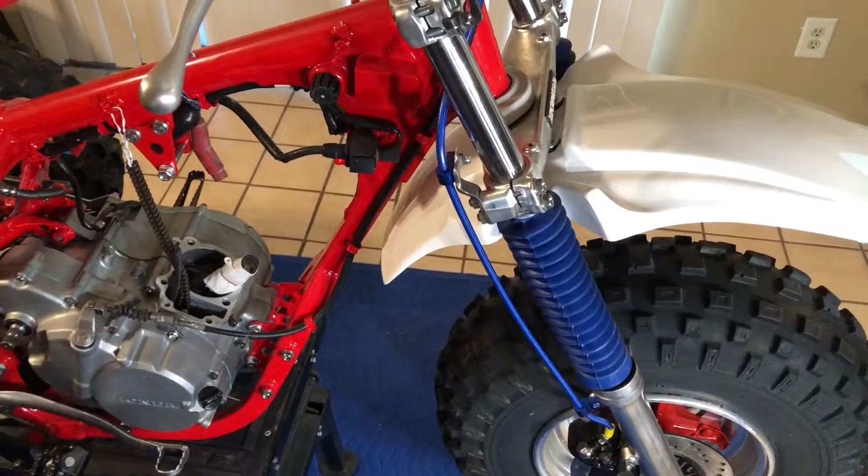All right, folks, check it out. We are ready to start putting the top end on this dog.

We're going to start out by putting the cylinder studs in. We're going to get those cranked down, and we're going to get the piston measured up. We're going to get the jug installed and the piston installed, and get all that together. We're going to put the rockers in, adjust the cylinder head, adjust everything, get all the gaskets down, and get everything sealed up.

Yeah, we're getting closer. Then we got this gas tank to go right up on here, and an exhaust, and an airbox, and a carburetor. That should about cover it. I'm ready to fire this dog up, let the engines roll. It's time to burn it down.

Yeah, you know it, the Black Label Society still rolling.

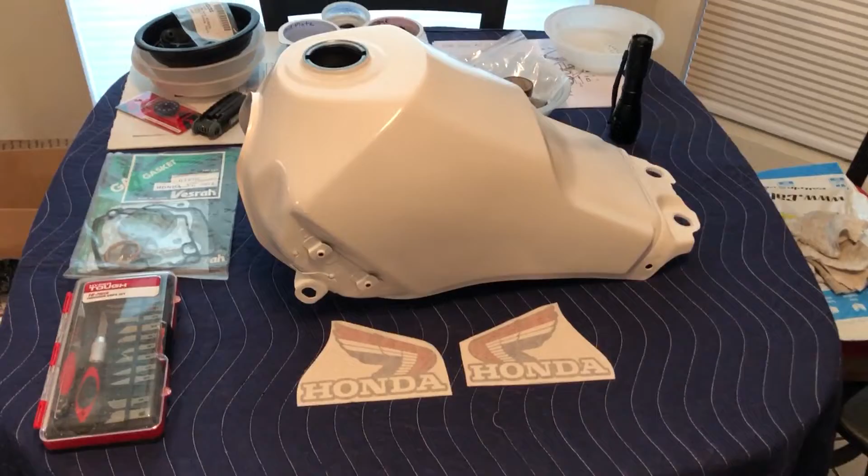Woo, all right, check it out. And then over here, yep, there it is. Look at that dog right there. We got the Shasta White, the Honda Shasta White laid down, and we're just getting ready to put the graphics on. Oh, that dog's gonna look nice. Woo, it's looking good, yes sir. We're getting there. Yeah, here we are.

There we go, there's our cylinder studs. We're gonna be putting those in here shortly. And yeah, you know what time it is.

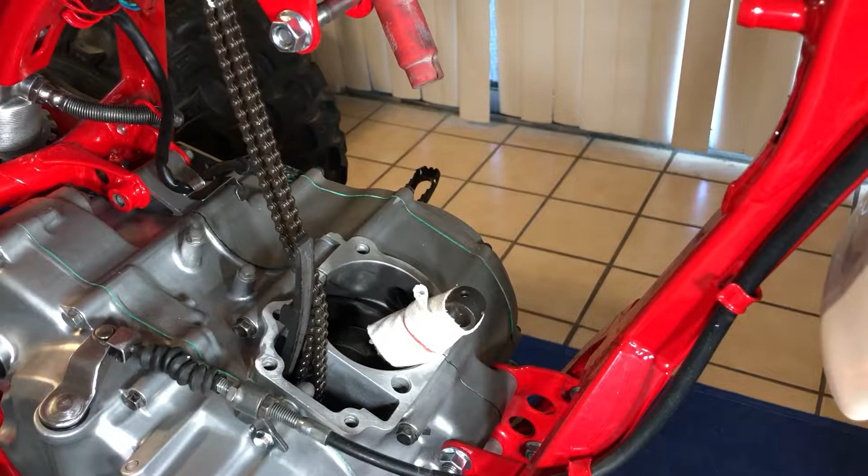All right folks, so the first step we're going to do when putting this top end on is put the cylinder studs in right here. We got 6 of them, 4 larger ones and 2 smaller ones. Obviously the 2 smaller ones are going to go where the smaller holes are.

Well, you can already see - I forgot and kind of got ahead of myself, and I didn't record it. I apologize, but I already got the clutch in here. All it is, it routes down through here, goes through the cables, through the cable holders right here, and zips in here. You attach this little guy, slide it through here, and these 2 nuts secure to the bracket that we put on there, and that's about that. Then you just pull it tight and adjust it at the top. We can get into the adjustments at a later time, but the clutch is already here in case you noticed.

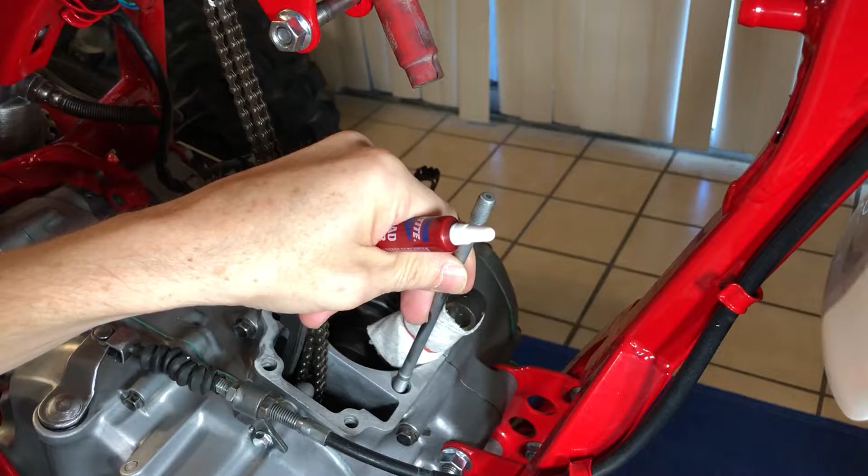And let's get these studs in there. So what we're going to do is put this raised edge down here, going to the bottom, and that is going to be the bottom, how it's going to stop, right? So we're going to blue Loctite these, a little bit of blue Loctite on the threads here. And why Loctite puts blue Loctite in a red container, I'll never know. But anyway, they do - make sure it's the blue liquid though. So it's just going to thread right in here.

And we'll just get all of these started real fast. Some more blue Loctite. And then we got one back here, and then we got the one behind here. So if we can get this guy to stay up out of the way.

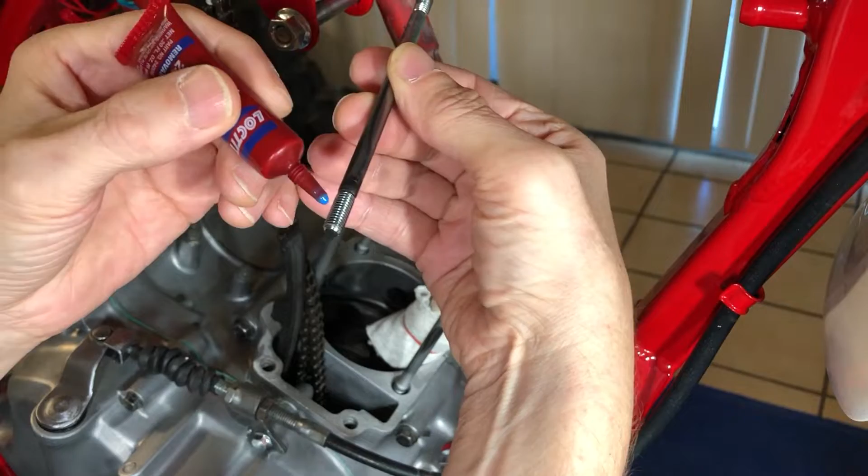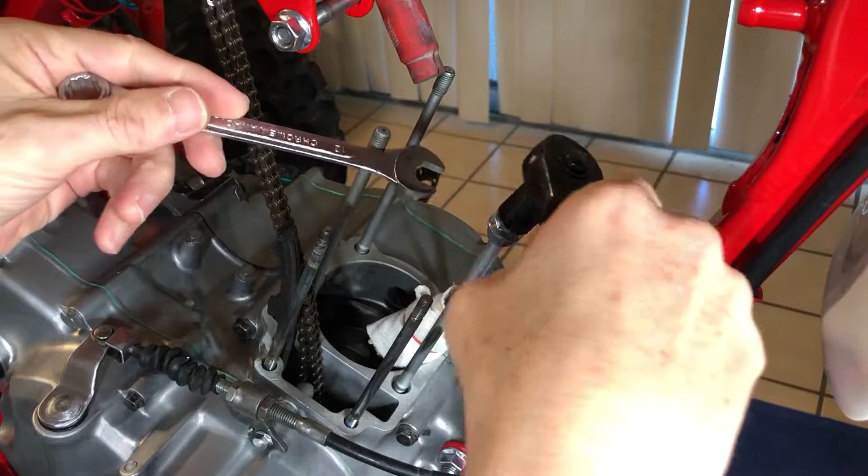And then what we're going to do to tighten these is we're going to flip this over. We're going to put one of the nuts down this way, and we're going to put the other one over the top. Then we are going to tighten them against each other, and that way we can just thread this right on in there. All we want to do is just snug them down in there, and then you can just back this off. And that's all there is to that.

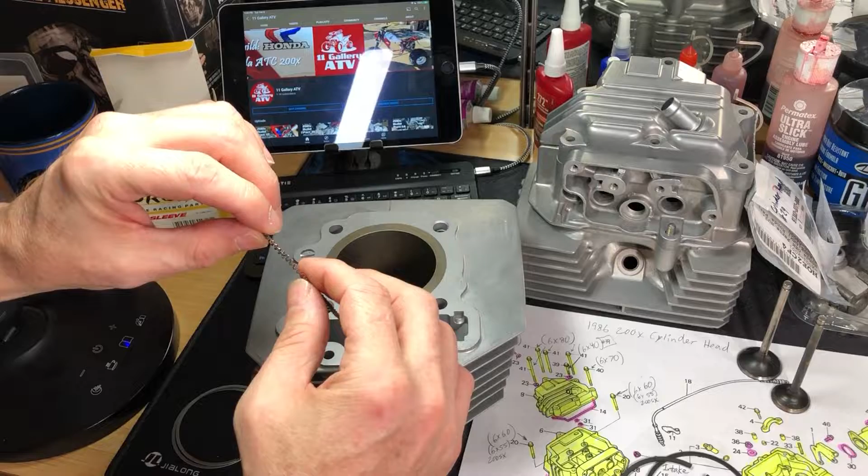And we'll get into how the ring stuff goes, because you want this guy to be touching like so, and not overlapping like that. That'll be bad. You want it to be butted up against itself right here. But we'll get into that whenever we put these together.

So these are the ones we're worried about right here. And these have an R25 on them. So that's a good sign. And this one has an RN25. And this one is a little bit thicker than this one.

Alright folks, so let's get these measured up and see about the ring gaps and make sure that everything's cool. It says in here, of course, that these rings are matched to the piston from the factory, of course.

And our piston is matched to the bore now by the shop, so all of this should be good to go, but let's give it a check to make sure.

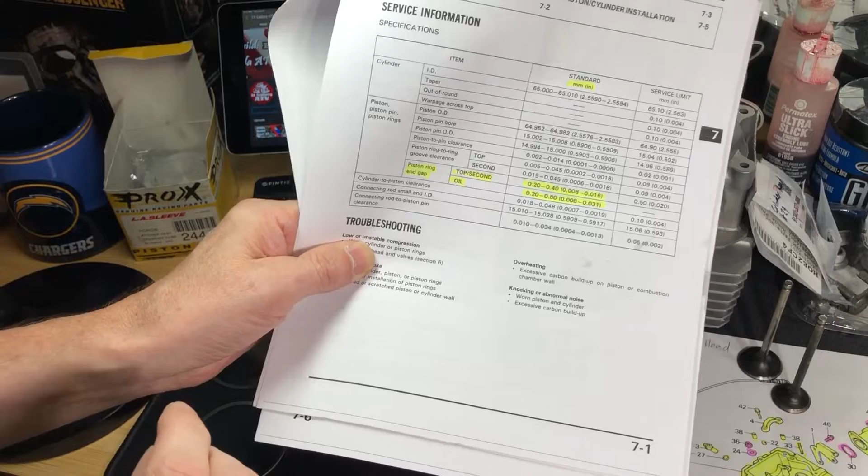And here are the ring gaps. So from the manual, the top and the second are both the same, and it calls for

0.2 to 0.4 millimeters, and that would be 0.008 to 0.016 inches. So we're going to use the inches.

I have both, but we're going to just use the inches because I feel like it. We're American. We're using inches. So anyway, let's do that.

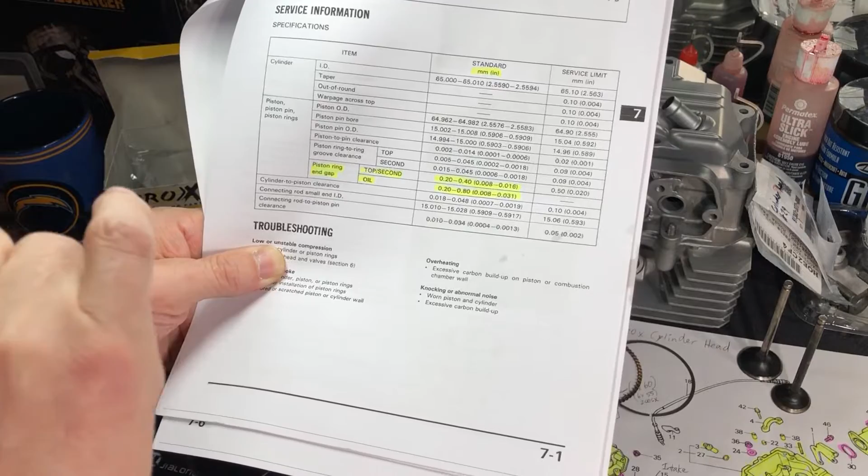So yeah, first step we're going to do. So what we're going to do, don't want to lose these.

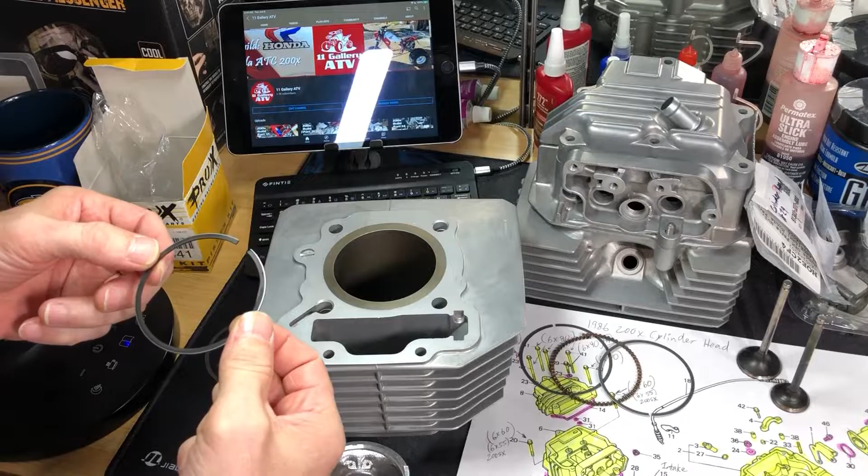Those are the circlips. So the first thing we're going to do is get our piston out, and we're just going to put this down in here. This is the RN, so this would be the bottom ring, but we're just going to put this in here.

And then we're going to use the piston to push it down a bit so that it's level. And now we got the gap there. We can measure it. So I got two different sets - this is 0.008 and this is the 0.016. So we could be anywhere in here, but let's measure the smallest one first to see if we can fit that.

And that's about right where we are, is the 0.008, because it's a pretty decent fit right there. So I believe that we're right at the 0.008, which is the smallest one. Man, these rings are exactly like they said. So this one's good. I also have this style, and either one doesn't matter, but let's just check them both to see if they're the same. Not really much play in there either, so these are exactly 0.008.

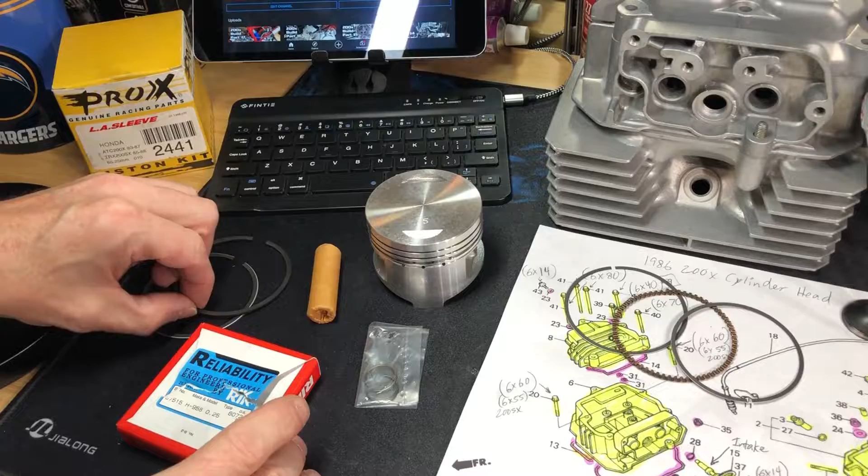So before we install the rings onto the piston, I am going to install one of the circlips first, while there's no rings on there, obviously it makes it easier to work with. And we're going to save this one for when we put the piston onto the connecting rod. So what I'm going to do is the intake - the piston is going to actually go in this way, because the intake will be the back of the motor. So this will be the left and this will be the right.

So I'm going to install the left one first because I'm going to put it in from the right side. And you want this one in the back, so when we put the wrist pin through, this will be the right side, and we put this side through. This one will already be in there. So it's going to go right here. And what I'm going to do is...

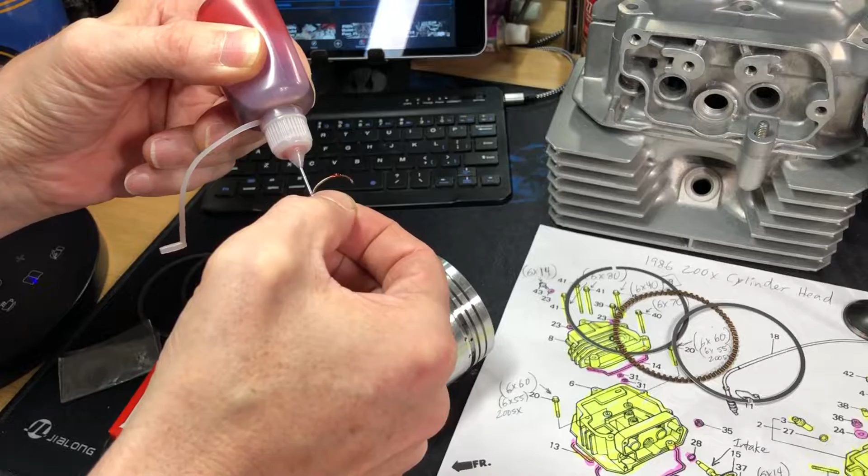Lube it up with some of the Ultra Slick Permatex Assembly Lube in my handy container. And of course, it doesn't matter if you get this stuff all over the place because all of this is going to be inside of there anyway. So, what you want to do with this is, I like to on these kind of pistons, since the gap is at the bottom, I'm going to put this at 120 up there at the top, and it doesn't matter which side - just you don't want the gap in the gap down here.

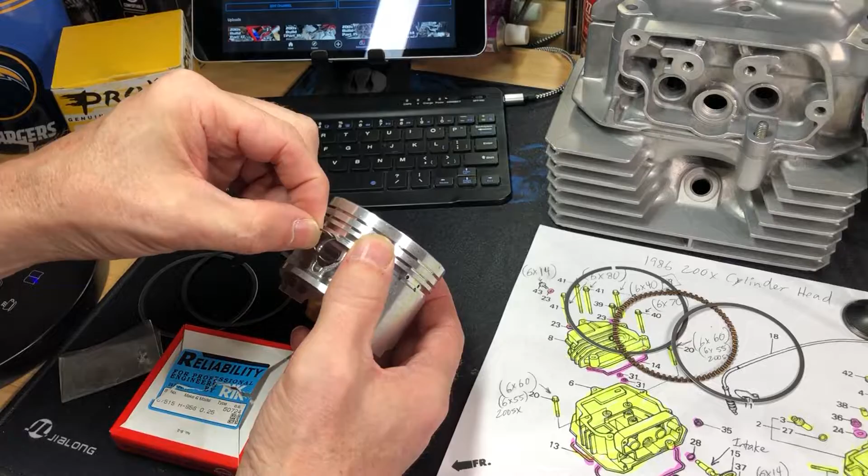So what I'm going to do is try to get one of them, the groove started here. Sometimes I can do this with my finger, sometimes I can't. Oh, we were in the groove, but I wasn't quite - there we go. Alright, well this one's being a pain in the ass. I'm going to need some extra finessing tools here. Alright, so the fingers didn't work.

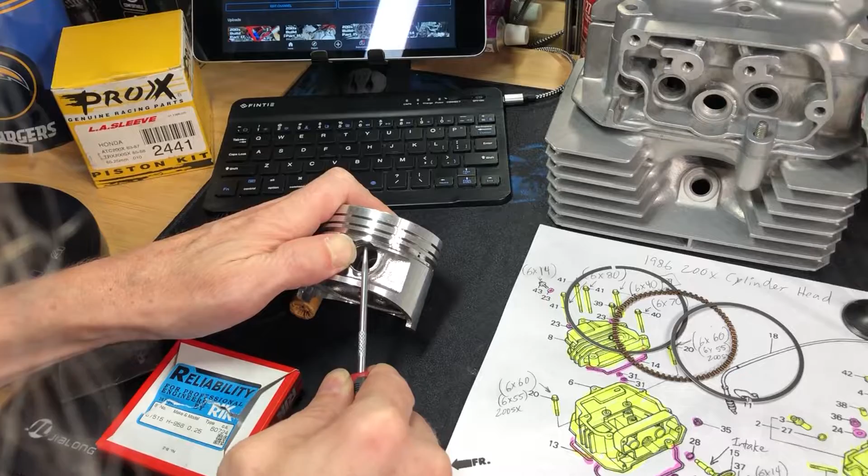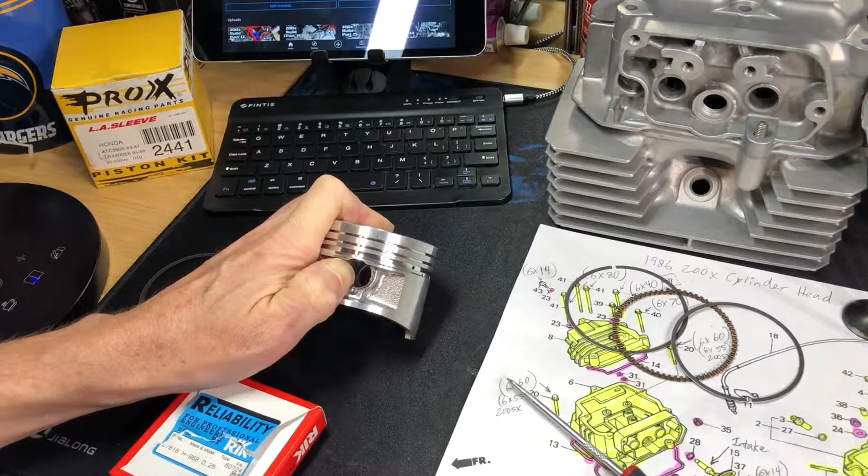So we'll try that again. We'll put it up in here. There we go. Now let's get that up into the groove. Let's try it with a screwdriver instead. There we go, now we're almost in there. So then we can come back with the pick. Boom - so that guy's in there like so.

And we're at 120, exactly where we wanted to be - we're away from the groove there. So yeah, alright, we got the circlip installed on the left side. So we're going to work like this, since this is our piston orientation, intake, back side of the motor. Again, some of your pistons, you want to make sure you got this in the right orientation though.

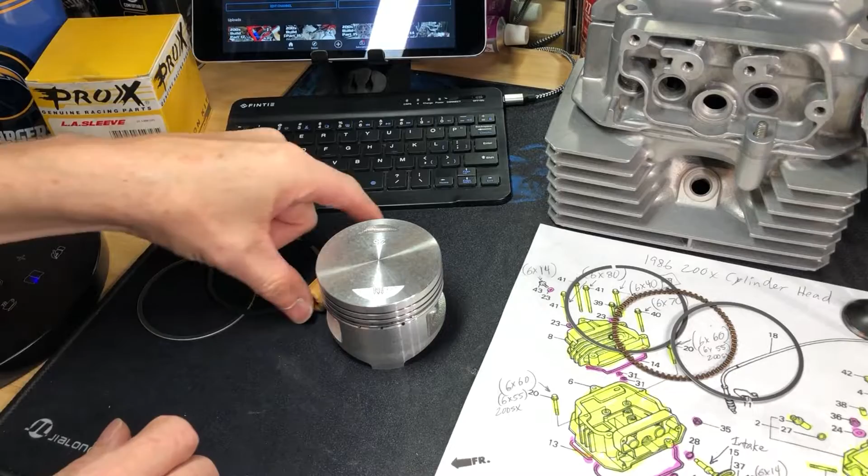Some of your pistons will say have an arrow, like Wiseco pistons have an arrow, and they point towards the exhaust - they don't have intake. So be very careful when you do this, that you orientate your piston in the proper orientation. Okay, now we can set all this stuff aside. We're done with the box. We're going to need this guy, so we'll set him aside. We're going to need the wrist pin later. Now we can put our rings on, and the way this is going to work is we're going to start with the expander.

And the way this is going to work is you want this guy to be butted up against it like that. You do not want these overlapping like this. You want them to be resting right here, right on the edge. Now, it doesn't matter whether this goes up or down.

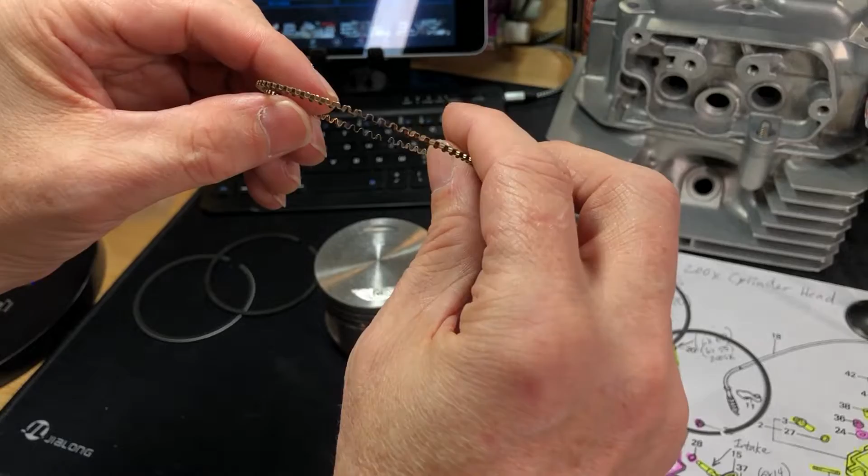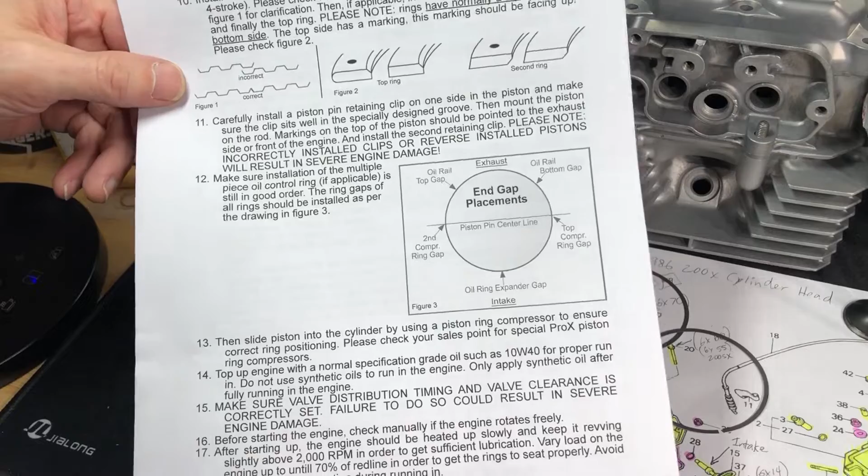And here's the diagram that I have from ProX. And this is going to be where all of our ring gaps are going to be. Now, the OEM manual calls for these in a little different position. But I'm going to use this because I've used this before. And this is the exact diagram that came with the piston that we're using and the rings. So we're going to use this orientation.

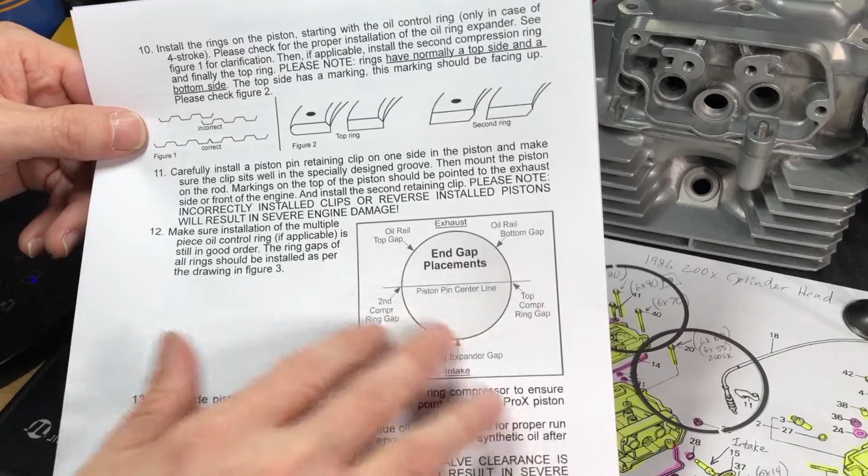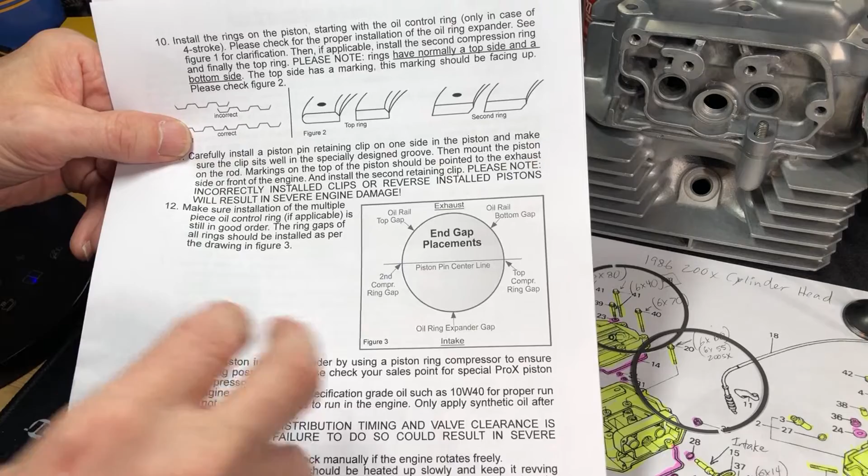But the OEM one calls for these two gaps right here to be right here, 120 and 120. They don't call for them to be directly at the wrist pin. I'm not sure if that makes any bit of difference or not. I don't think so. That's why we're going to do it this way. So we're gonna put the oil expander gap at the bottom, and that will be on the intake side.

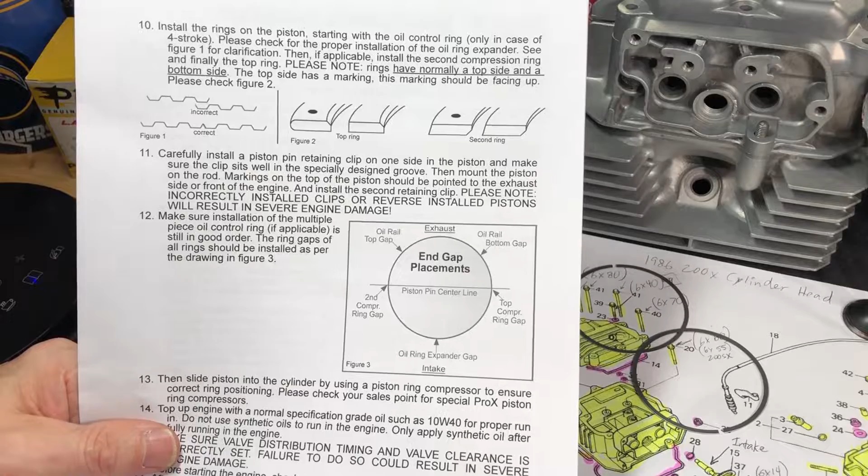So we're gonna put the oil expander gap down here, and then we are going to put the top ring gap over here, the second ring gap over here, and then we're going to put the two oil rails over here and over here. Now, I'm quite sure if you wanted to put the top and the second gap here and here, that would be perfectly acceptable. But I'm going to do it the way this is because this is the piston I got and the rings I got. So this is the way it's going to be. All right, let's get it done.

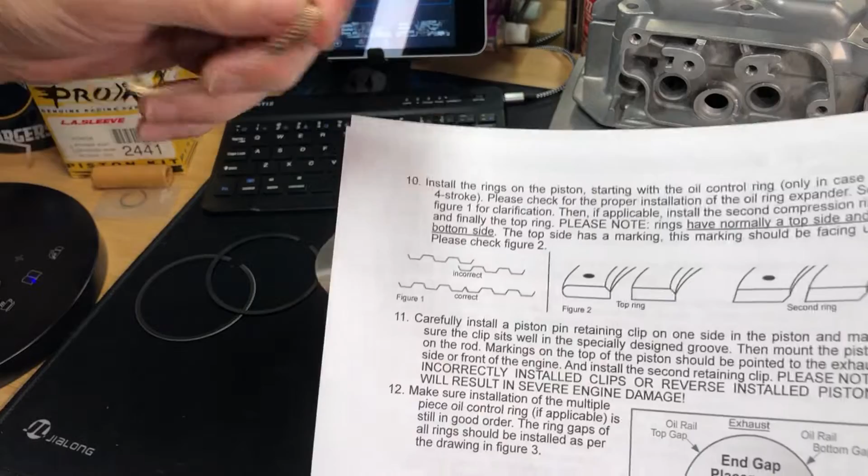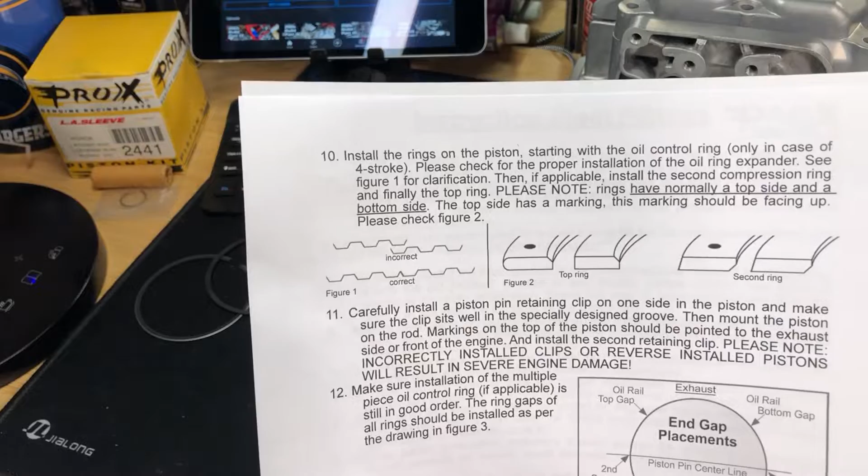Oh yeah, one other thing to mention. It doesn't matter whether this goes up or down like this, but I'm just going to put it up, seeing how that is the way that the diagram is, but for no other reason than that. But it does not matter which way you put it. So if you've installed your motor and you realize that you put those facing down, so be it. Run it, do it, send it.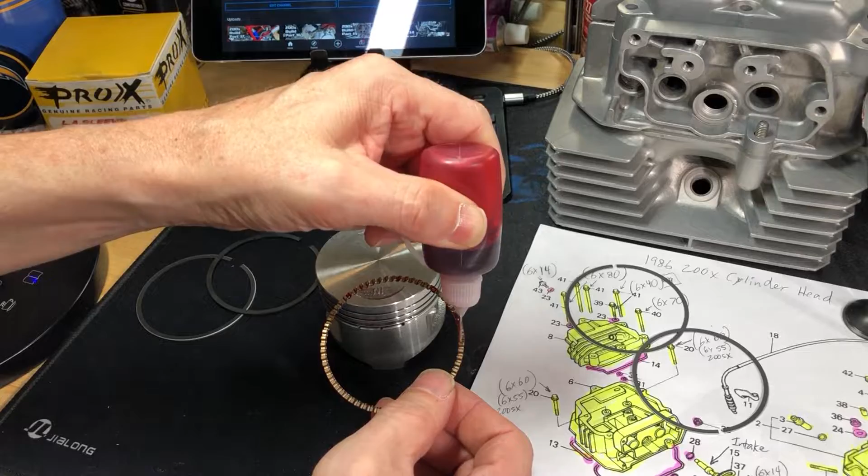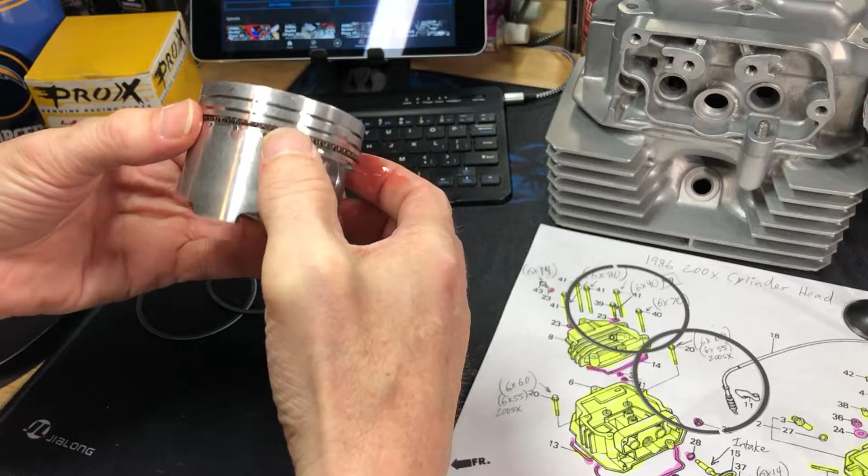It'll be all right. So what we're going to do is we're going to use some of the Permatex Ultra Slick Assembly Lube, and we're going to hit all of these guys. But we're going to use the easy container. Alright, so this guy is going to go with the gap on the bottom. So we're going to put him right in there. Boom. And we'll make sure this dot right here happens to be 90 degrees, so we'll put it right at that dot.

And then next, we'll take one of these guys. And these oil rails, they don't matter which way they go. They don't have a top or a bottom. They are interchangeable. So the diagram calls for the bottom oil rail to be right here. So what we're going to do is just, and then we're just going to walk it around. Then you just keep walking it around and make sure that it goes onto the bottom.

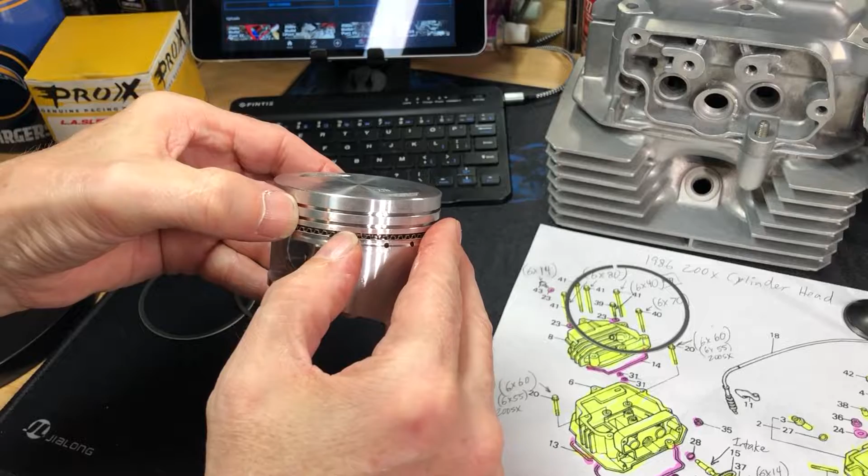And there it is. And there's our gap right here. So we can also kind of push that out, right? And then you can snag it. Make sure that you hold the oil rail though. The oil expander. There we go. We're about right here. 120.

And once we get all of these installed on here, we'll fine tune it, of course. We'll grab ourselves a little pick and we'll fine tune all the gaps to make sure that everything is where it needs to be, but we're going to try to get it exactly where they are without too much hassle. But anyway, now we put on our top oil rail.

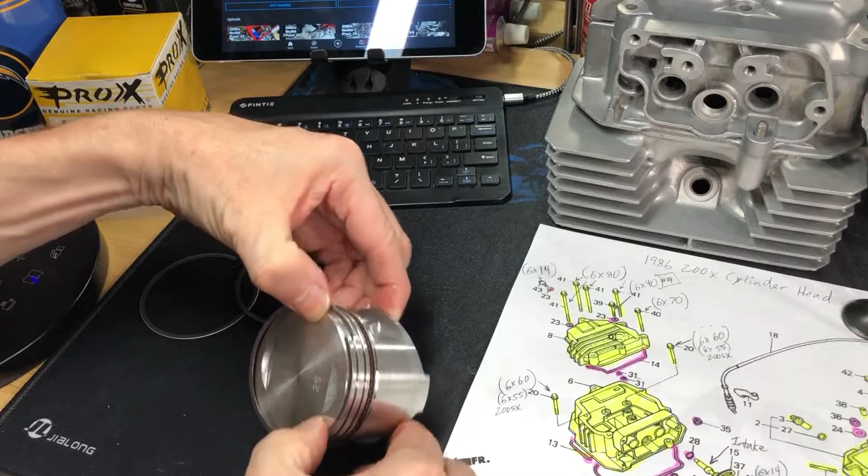And we're going to try to get this gap to be right here. We got the other one on this side. This guy is going to go over here. So again, we get it started. And then we just walk it around and make sure that it's on the top, which it is.

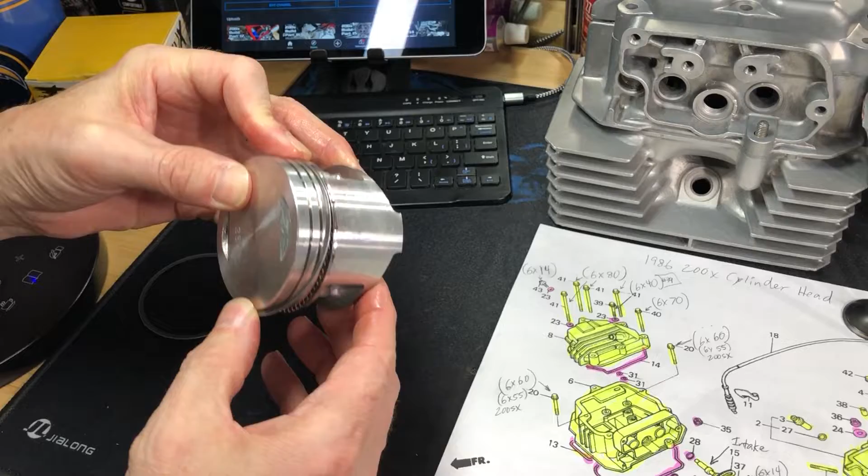And there we are. Now we should be right about here, which we are. We'll get these over here. We'll put one on one side of this guy and one on this side of this little mark. Right now I'm over here, but we'll fine tune it once we get these on. But you definitely want to make sure you got one on the top, one on the bottom, and then you got the oil expander in the center.

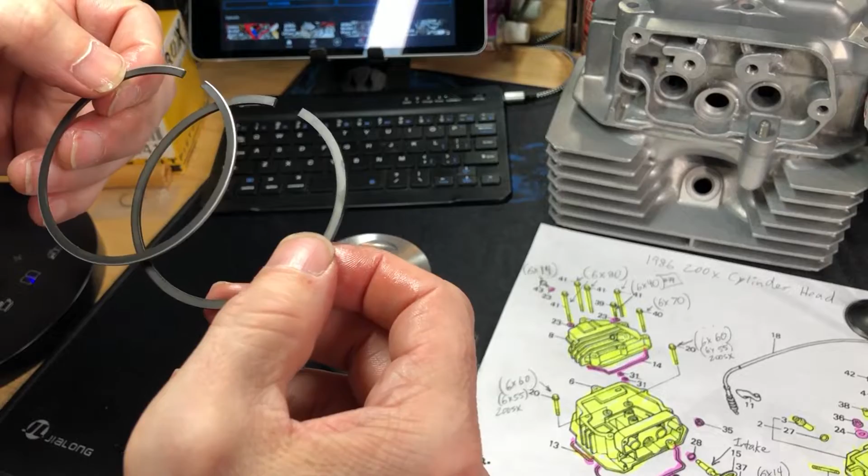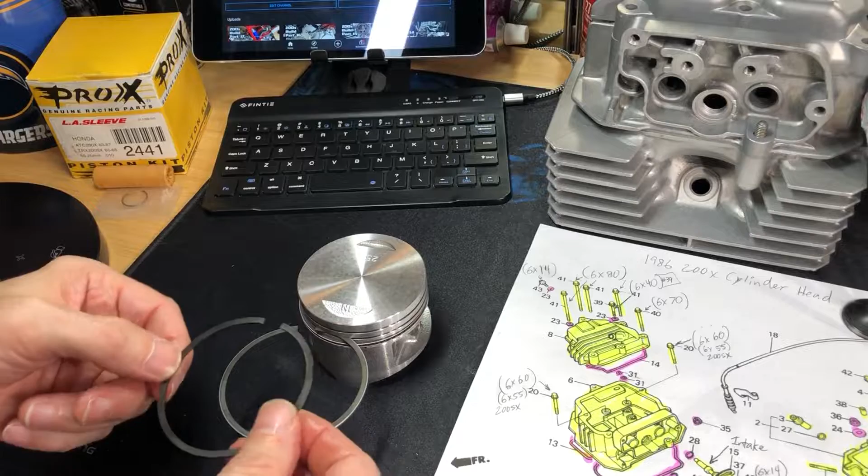So now let's put our piston back in the right orientation. Now with these, we got a top and a bottom here, right? So the way this works is this one has an R. I don't know if you can see it or not, but there's definitely an R on this one. And this one has an RN. Now the RN is going to be the bottom one. It's going to go in this slot, and the R is going to go into this slot. So the R is on top, the RN is on the bottom, and the writing is going to face up.

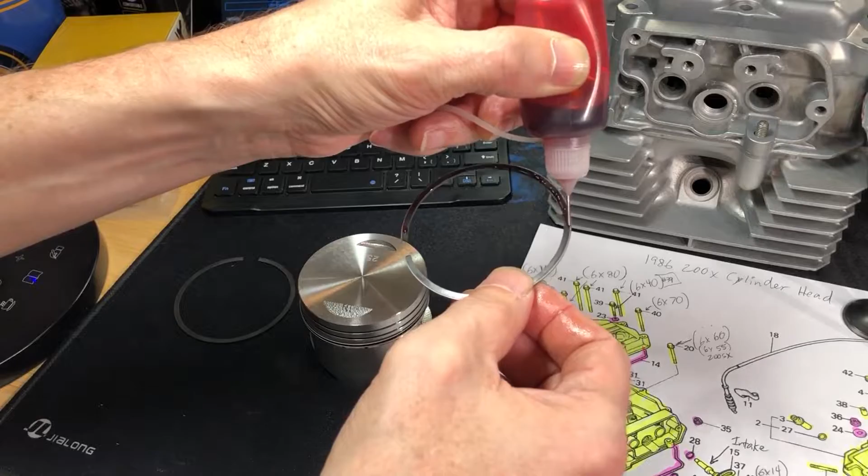Alright, so let's get us some assembly lube on this guy. We're going to go top and bottom with these because the other ones had other rings that went with them, so they had more lube. These guys are standalones. So there we go.

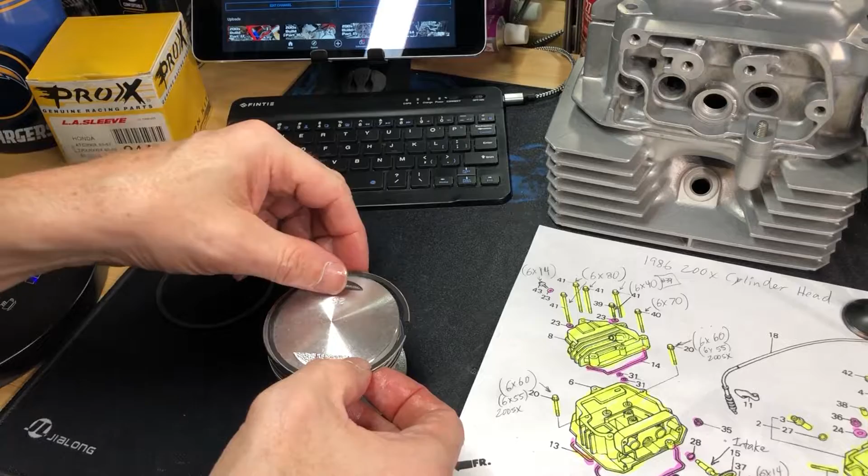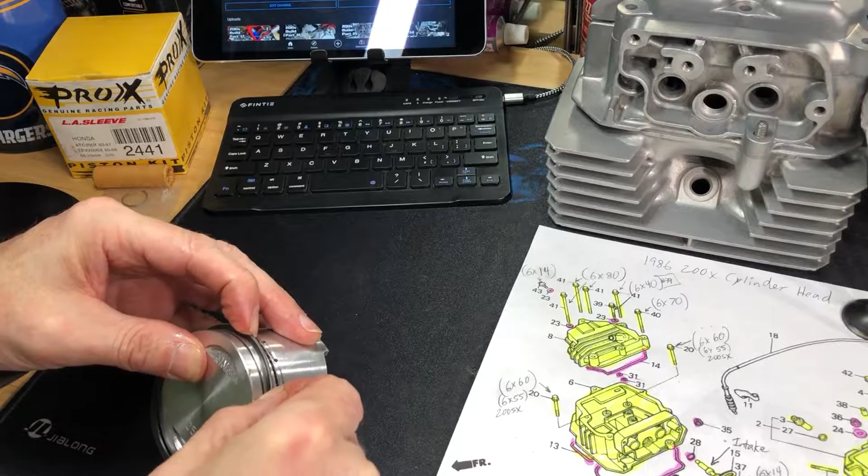And now the ProX diagram calls for these two to be staggered 180 degrees apart, and we're going to put the second ring gap over here. What you want to do with this is get it started in the groove, right there, and then just walk it around. Be very careful while you keep sliding it down and making sure that it goes in the groove.

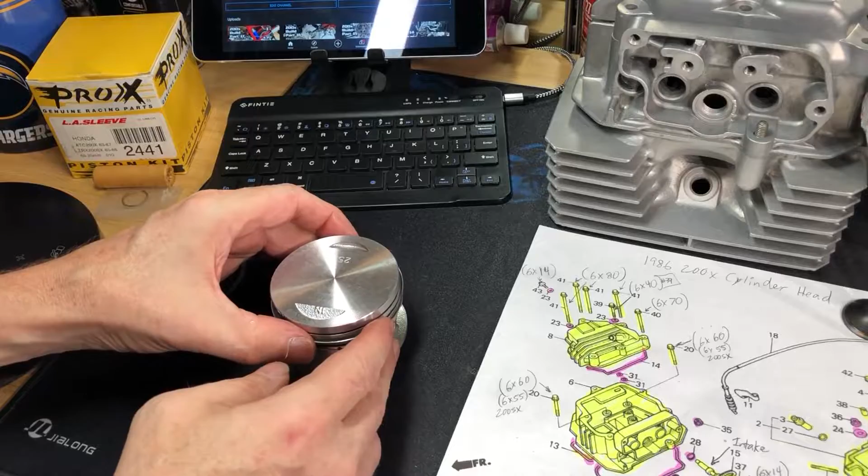Okay. And intake, so we want to be right here. Now our piston's back where it belongs here, and we're going to take the top ring and orientate it this direction, so it's going to be directly the opposite of this guy.

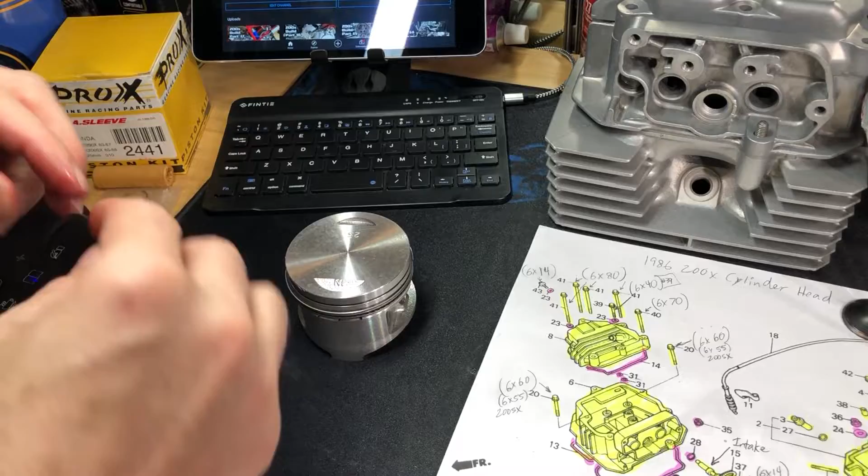And then of course you want to make sure you find the mark. Let's just make sure we got that mark down there right. Yes, the RN is facing up. That is exactly what you want. Thank God, because I sure didn't even pay any attention. I just threw that sucker on there. Man, you got to really pay attention.

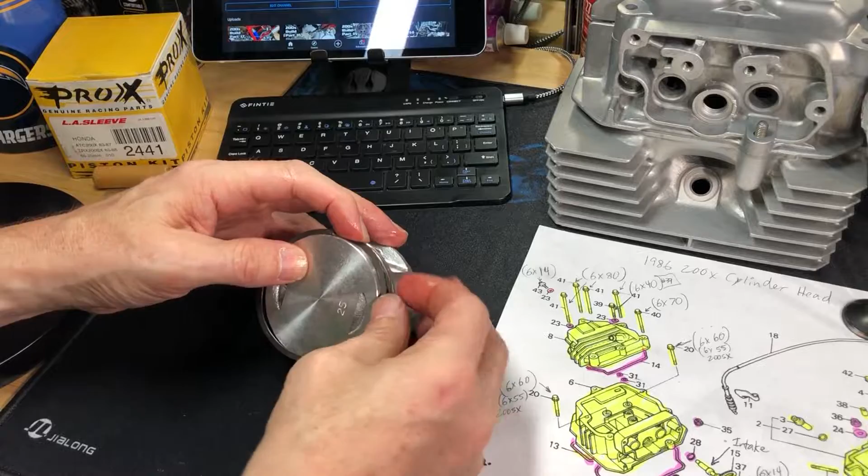Okay, so now this guy, you want to make sure that you find the R. The R is here. The R is going to go up, and we're going to start it on the opposite side of the other one. So what you want to do here, I'm going to start it right here in the groove, and we're just going to walk it around. To make it easier, you want to make sure that this end is not around the piston, because that makes it harder. You want to slide it in and make sure that this wraps around, goes up over the top, and then it'll be much easier to get it going. There you go, just walk it around.

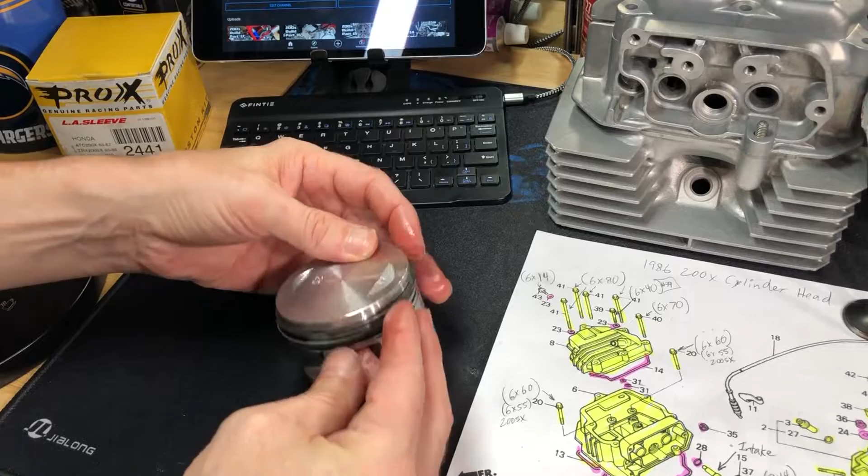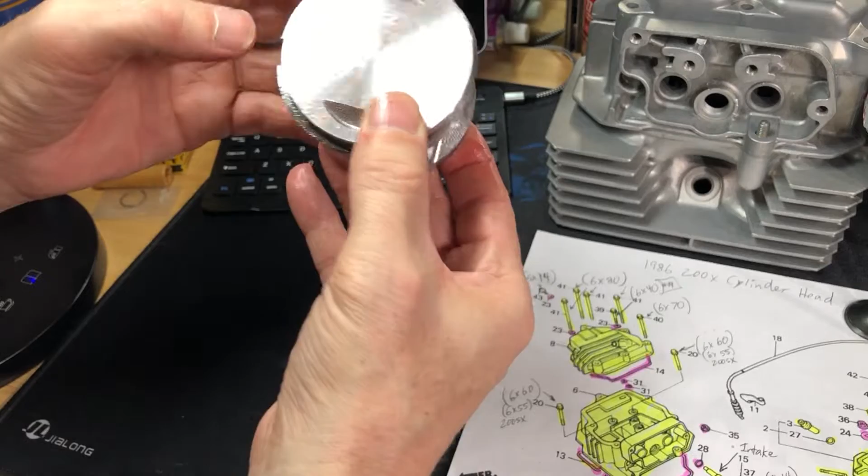And there we are. Now our piston's going to face this direction, so we can get all of our gaps lined up now. We're going to double check these before we put the piston in anyway, but here's what we want: we want this guy, we got the gap right here, and then this guy, we have the gap on the other side. And then here, our oil expander, we should have at the intake side, which is the bottom, we should have it right here, so the gap is right here.

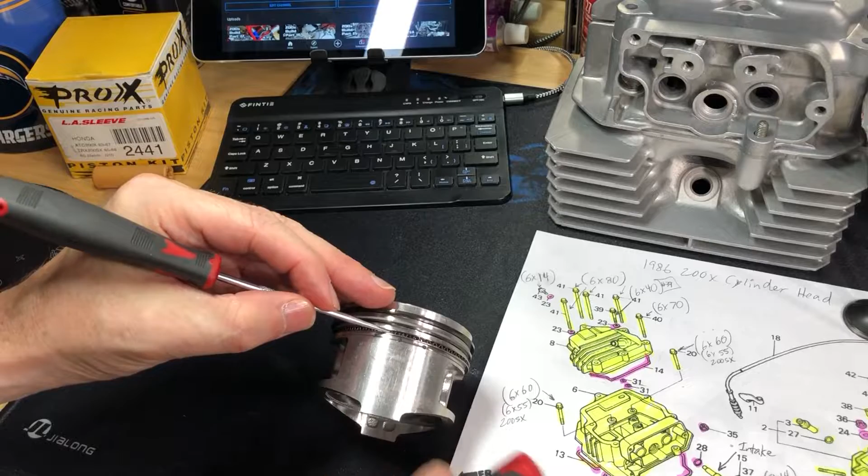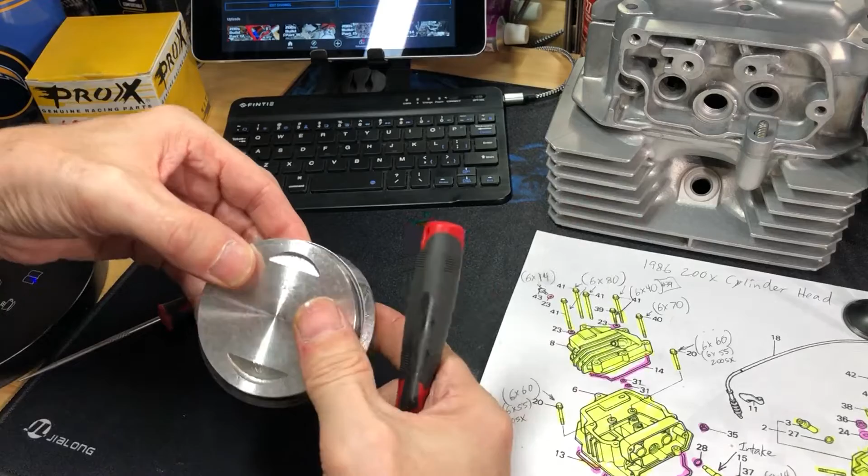So we definitely want to put that right there. So now we have the oil expander gap right here and butted up against it. That's perfect. And now we should have the bottom gap is right here, which is perfect, and we should have the top gap right here, but we have it way over here. So we could just give that a little adjustment.

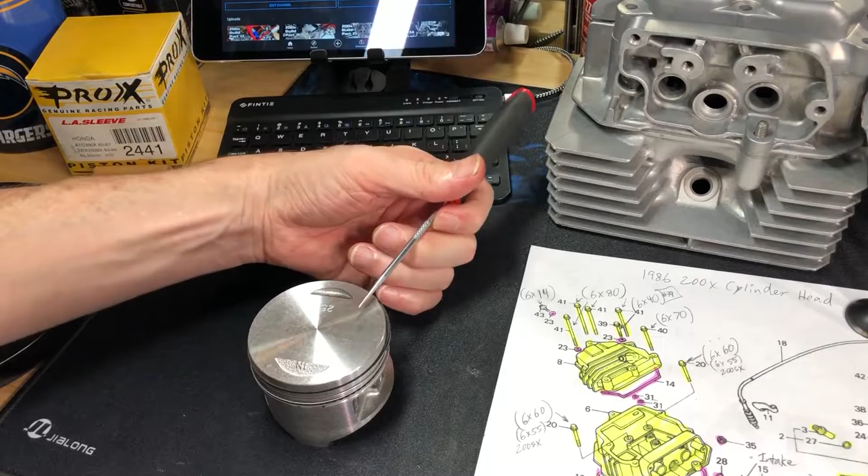All right, so now we got it right here. So we're perfect. We got one here, one here. We got the oil expander here, and then we have the second ring here and the top ring here. Perfect, that's what we want. So now we can set this aside. We're ready to install the piston. All right, people, check it out.

Here we are. Now that we got the piston rings installed and all the gaps lined up properly, let's get this sucker in here so we can close up this hole. So first off, what we're going to do, which I should have done already, is get rid of this.

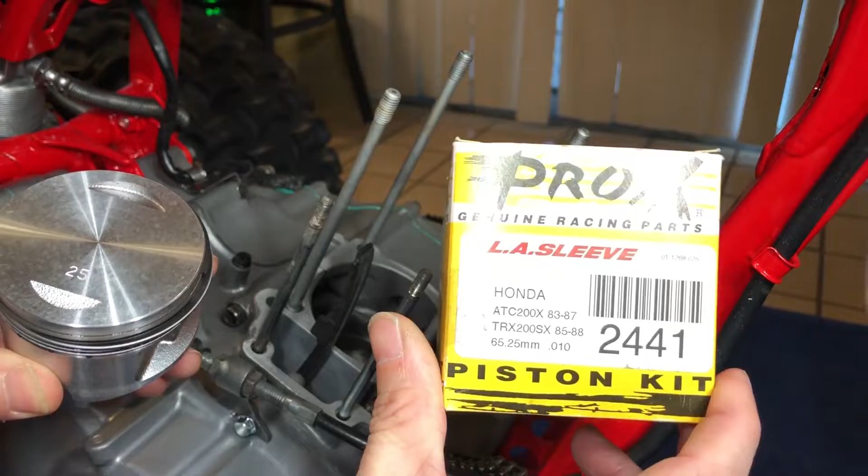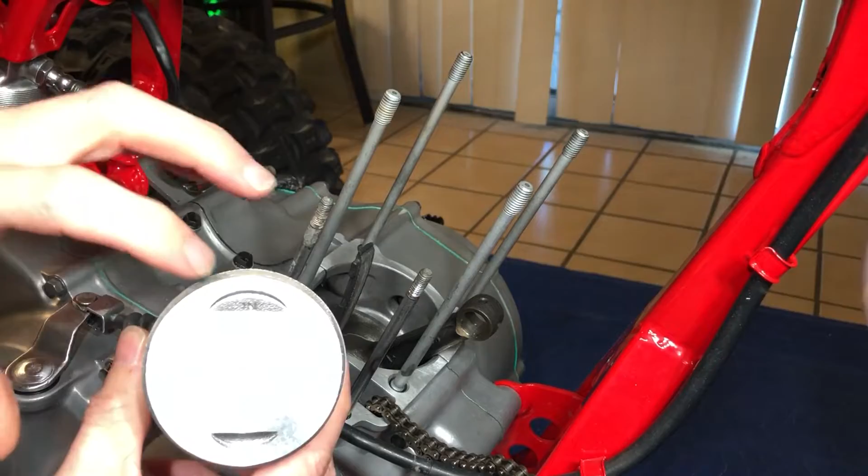So the first thing we're going to do is take our piston. This is our ProX 25 over, a 65.25 first bore over. I had the cylinder honed and bored by my shop. Now, this piston right here has the intake side this direction - the back side of the motor is the intake, so we're going to install it this way.

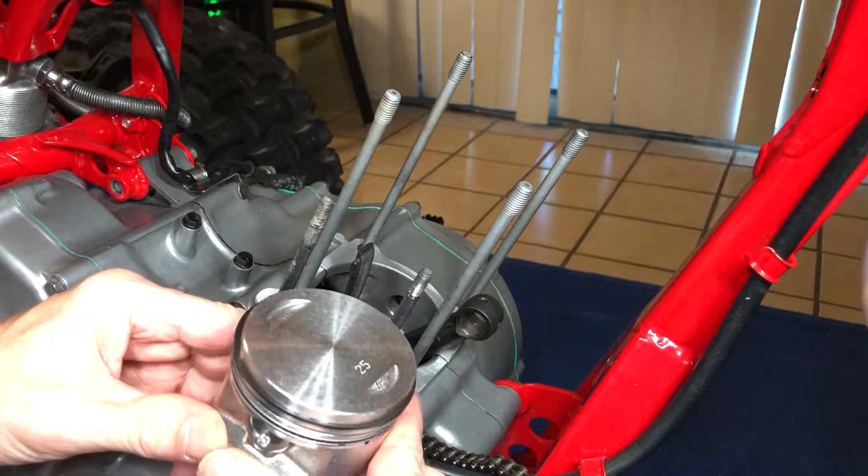And that's why we already installed this piston wrist pin circlip. Let's get that on there, making sure we don't mess our gaps up - we got these things gapped up all the way they should be. So we're going to take the wrist pin and put a little assembly lube on it.

And we're going to take our piston and put this right in a little bit of the way, and set it down on here. There we go. What I was doing was looking through the hole and lining up the connecting rod, and now we can get that wrist pin pushed through there all the way to the other clip that we have in there.

Let me take a punch and push it through the rest of the way so that it locks up against the circlip on the opposite side that we've already installed. You want to make sure that's all the way against the other side. And now we have our circlip groove opened up on this side.

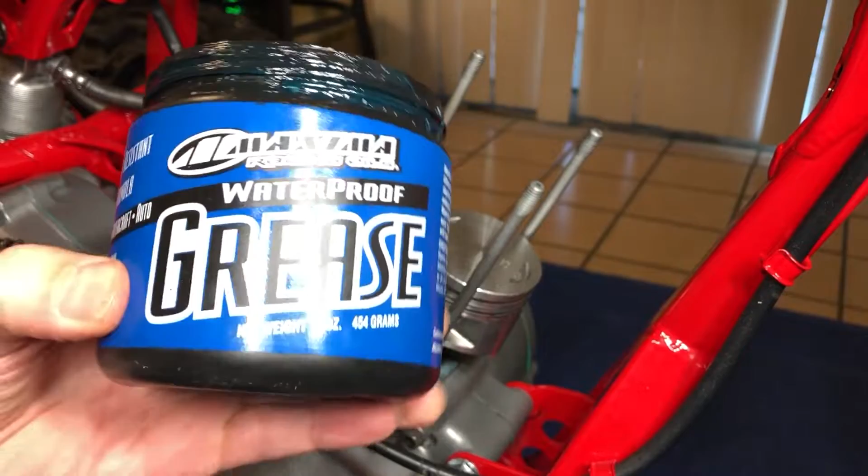All right, next we're going to lay down the gasket. What I like to do is, since the base gasket here is paper, not a metal one, we're going to use the old Maxima waterproof grease to help with the sealing process a bit, and also so we don't have to worry about using a razor blade and all that crap if we take it apart later on down the line. And then we're going to do the same with our Maxima waterproof grease.

We're going to do the same to the bottom of the cylinder jug here before we slap it on, before we put the gasket on. So we're going to hit this surface. But I'm not going to record all of this because that's kind of redundant. You understand what I'm doing here, so let's get this done.

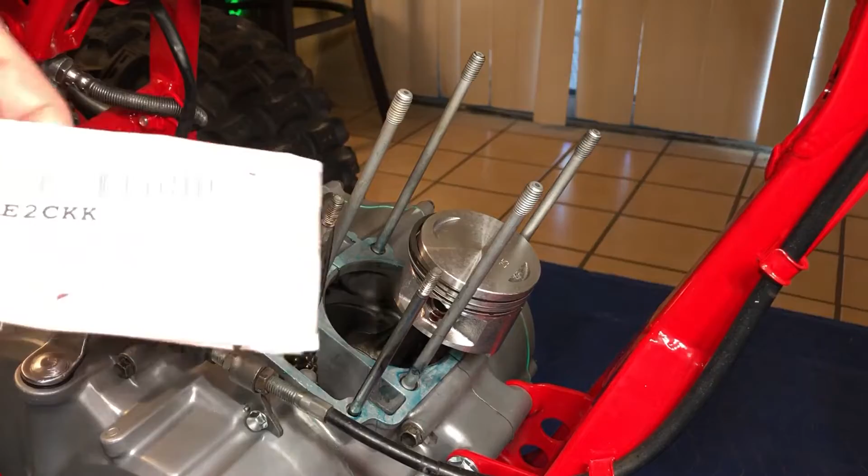Alright, there we got that all lined up. So we can set this aside for a second. And next we got our OEM dowel pins straight from Honda. So let's get our dowel pins set up.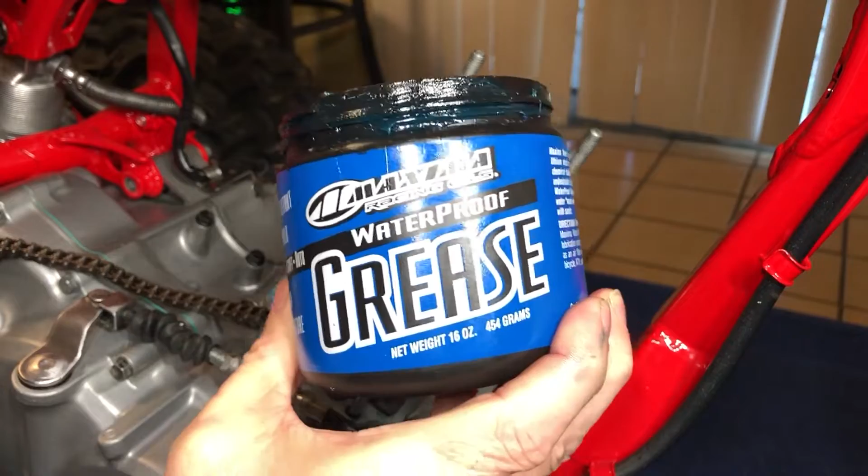Again, we'll take our Maxima waterproof grease and line up the dowel pins so they don't get seized up in there. We got one on this, and one on this one. Just want to make sure those go down in there. We'll get rid of a little bit of this excess grease right here, because once again it's going to smash down, and we don't want too much grease in there.

Alright folks, next we're going to put our gasket down, and we got ourselves a Vesrah top end gasket kit for the 1986-87 Honda ATC 200X. Made in Japan, not China. Very important, these are good quality stuff right here.

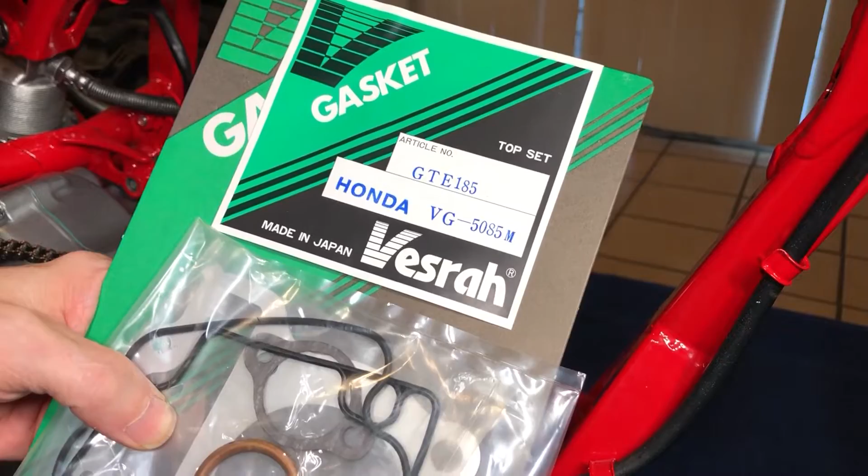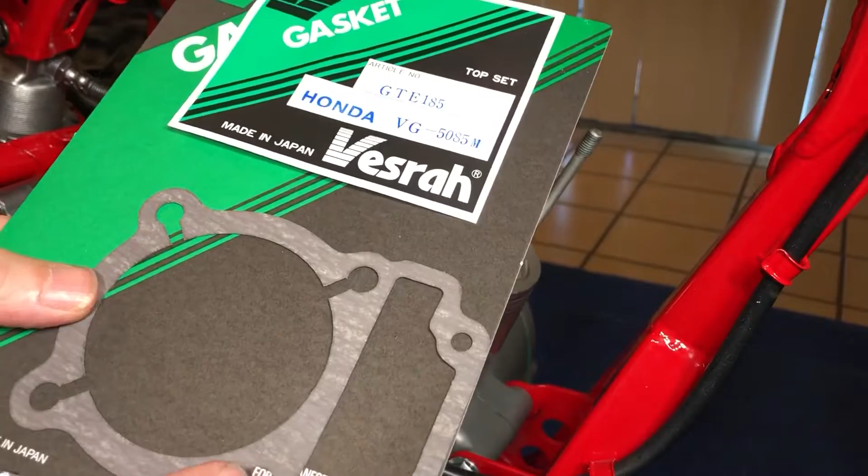So yeah, you don't want to get these mixed up right here. This is the head gasket, the metal one is the head gasket, and this is the base gasket right here. So that's why we put the grease down, because we're using paper on the base gasket.

So let's get that baby secured down. The base gasket has a bigger slot on this side than it does on this side, and that is to account for this oil flow hole right here, the oil flow hole.

Alright, so let's get the base gasket set down there. And of course you want to feed the timing chain through. Be careful not to rip it, and of course we want to go through the piston.

Come on, piston, don't be a dick.

Alright, so we'll just get our timing chain hooked up there at the top, and we got our piston hanging out down here. We got our gasket all pressed down.

Now comes the time when you want to double check your ring gaps to make sure that everything is where it's supposed to be. Okay, so we have the bottom ring, the second ring gap, the second oil ring is right here. That's where we want it to be. The top oil ring gap is right about here. And you have to take my word for it, because that's where I say it is.

So that's where it is. It goes right here. Once again, the Honda directions call for these to be 120 degrees apart, like up here and up here. And the ProX directions say to put them directly right here. So I did a compromise, I put one right here and one right here. That's plenty, as long as they're far apart from each other, good to go. They say 120 degrees, I'm more than 120 degrees, so we're good to go.

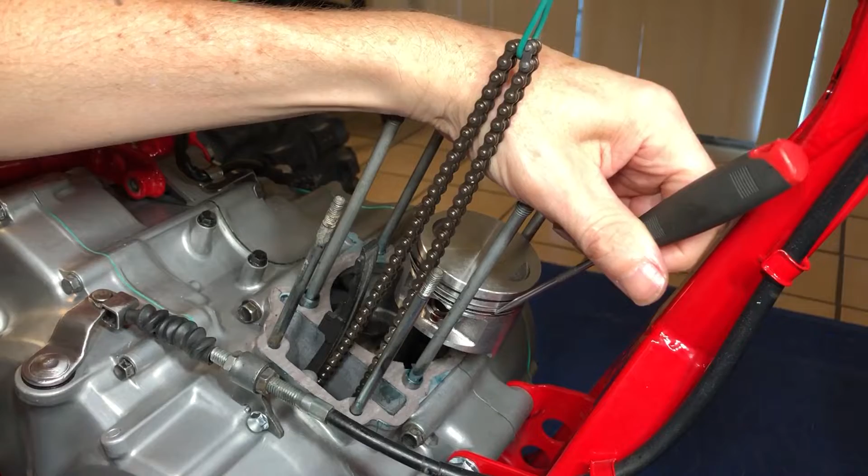And now we have right here is our bottom oil rail, and right here is our top oil rail, and right here at the intake is our oil guide, and it is not overlapping, and better make sure of that. It's not overlapping. Not overlapping, and right at the bottom, so we're good to go.

So guess what we can do now, folks? We can plop the jug on there.

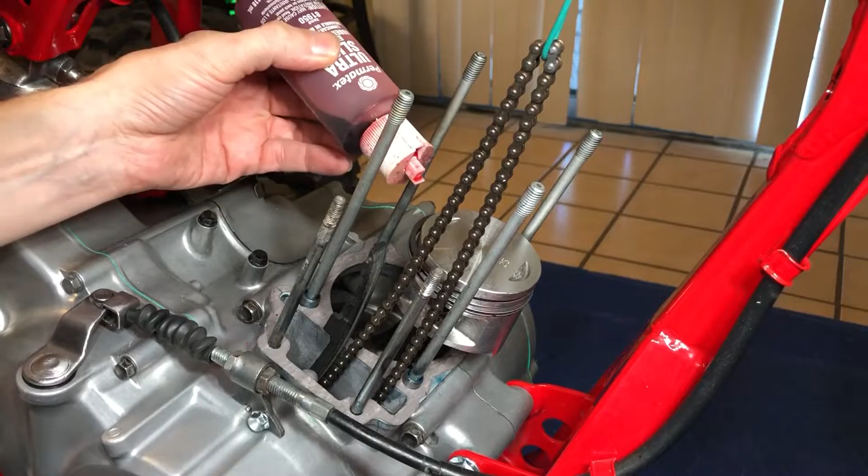Woo, we're getting there. Alright, so what we're gonna do is we've already assembly lubed up the rings when we installed them, but we're gonna try to hit them a little more while we're sitting here.

And we're going to drop a little on the crank here, and down on the cam chain. Okay, now we want to get some right in the jug.

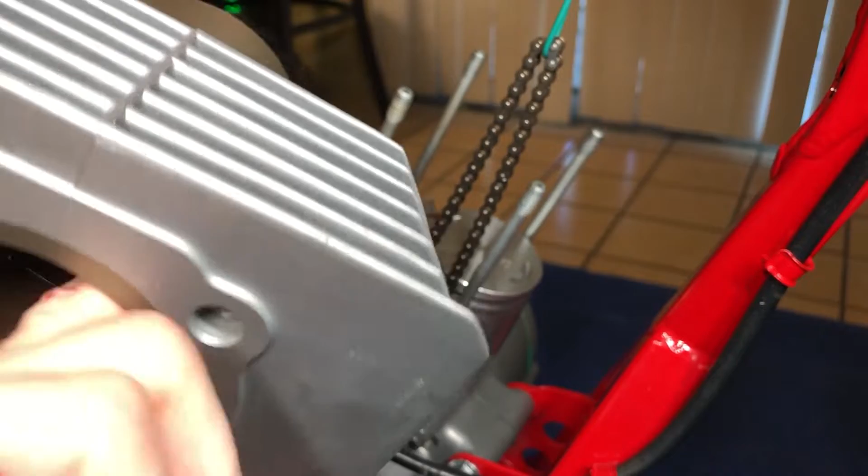And then, of course, let's flip it over and get that all up on the top side too. There we go, we're all lubed up in there.

So now we can compress our rings in and drop this sucker down. Of course, we need to feed our timing chain through and make sure the chain guide comes up through as well, and make sure it doesn't get hung up. So let's get this done.

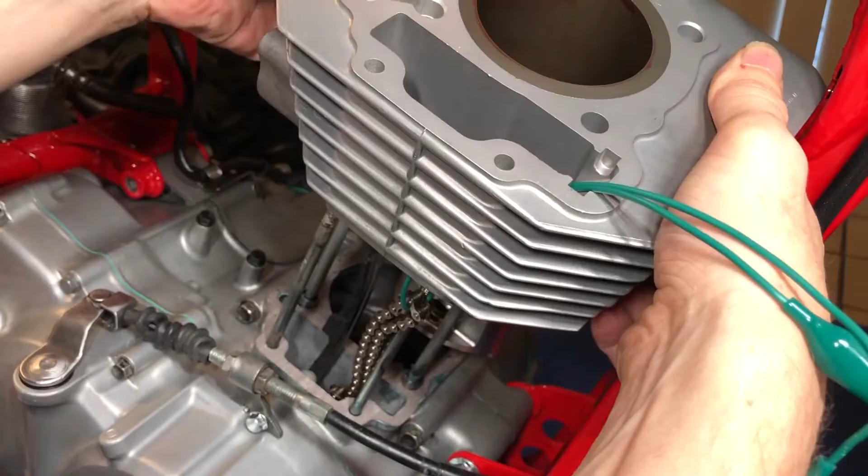Alright, so the first step we're going to do is we're going to feed our timing chain through. And then we can get a few of the bolts started.

If we get it up through here and off of there - and you just did a dick move, didn't you? Yes.

Alright, so now let's put our timing chain, hook it back up. Okay.

Now, what we're going to do here is get this picked up here, get the piston started, make sure that all the rings get compressed in there.

Oh, here we go. That did not do what I wanted it to do. It turned the piston. Oh, you fucking whore.

Alright, so let's try that again, shall we? So I put it back up into top dead center so the piston doesn't move. I put a socket on the side here, so if the piston starts to drop in like it did, it'll catch down there and it won't go back in. So let's try that again, see if we can't do a better job this time.

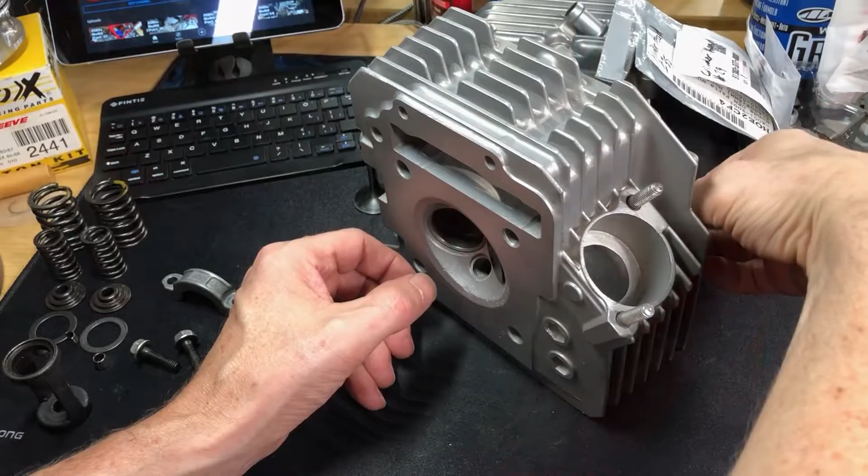And I don't know if any of you saw my post. I posted on YouTube, but we got a bent valve. So that's not cool. Yeah, so I'll show you some of that. Oh, well, guess what, folks? We have a problem. Yeah.

Check this out. If you watch this as you spin it, do you see it? I should have noticed that when we were doing this. Check this out. It's bent. So we are not going to install the valves. We are just fuckered. We're going to have to get a new valve.

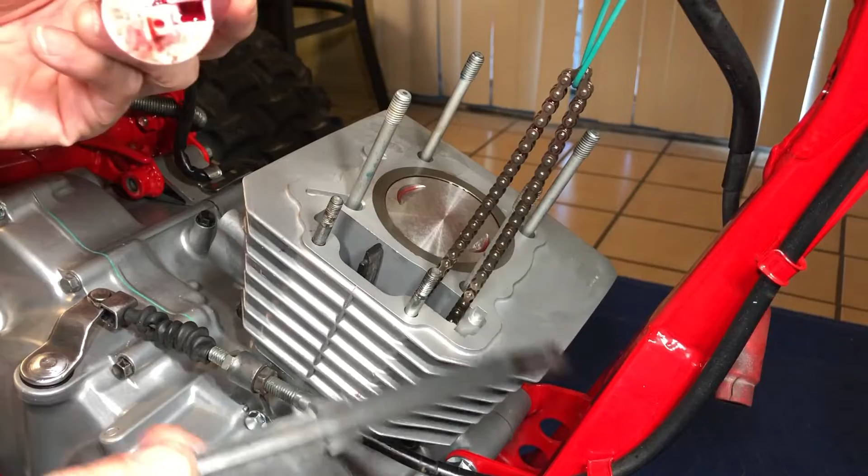Alright folks, next we got our chain guide that's going to go right down in here, and this guy right here is going to hook into these two little notches on here. So let's get us a bit of assembly lube up on this guy right here. And then it's going to go right down in here like so. You want to make sure your chain is between both of these guides. Here's the other guide and here's our new one. So it's going to sit just like that. And you want to make sure it doesn't, it can't flip up this way, so it's in place. So yeah, that's pretty secure, going nowhere.

Woo! This is exciting. We are cruising right along. I can't wait. Pretty soon we're going to have the exhaust up on here. We're going to have the intake boot. We're going to have the carburetor. We're going to have the gas tank, which we already saw painted. We'll have to get into that. But yeah, that's going to do it for this video.

Next video, we're going to assemble the rocker arms. We're going to get the cylinder head all done. We're going to get the cylinder head cover assembled. We're going to get all that stuff taken care of. And we're going to pop this head on. We're going to get all this stuff on. We're going to fire it up.